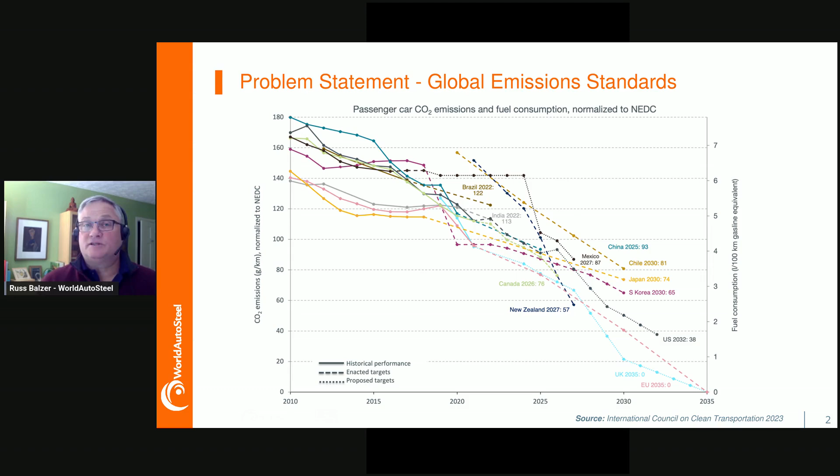These increasingly stringent regulations are intended to help the transportation sector play its part in reaching very specific emissions reductions targets. At WorldAutoSteel, we believe that the current approach to automotive emissions regulations is not an effective way to do this.

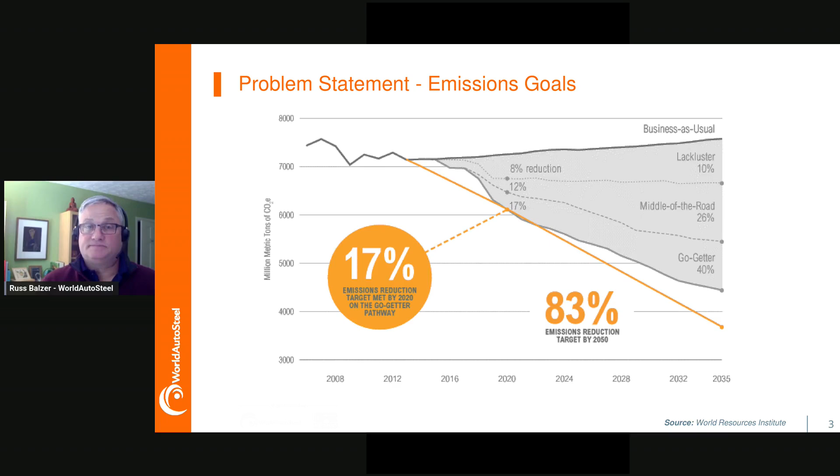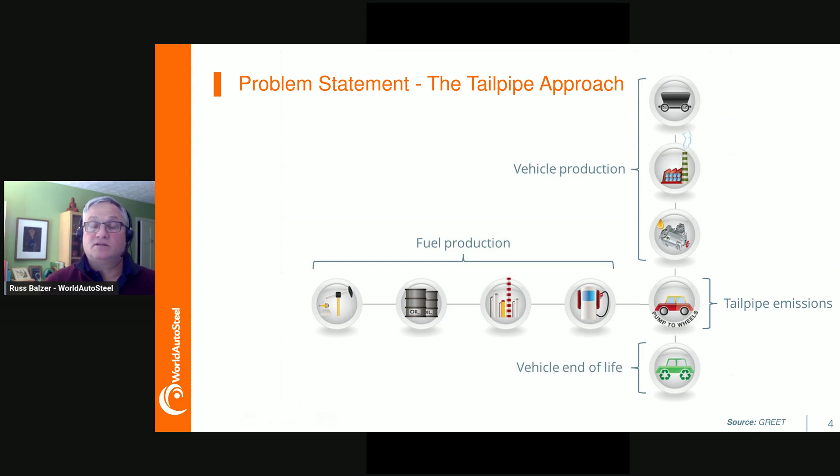The problem is that current regulations only look at tailpipe emissions, emissions produced while the vehicle is being driven. Other significant sources of greenhouse gas emissions like fuel production, vehicle production, and treatment of the vehicle at the end of its useful life are ignored. One of the effects of this approach is to force automakers to adopt vehicle lightweighting strategies that can lead to unintended consequences for the overall vehicle emissions.

The reason for this outcome has to do with the emissions from the production of the materials from which the vehicle is made. This chart shows the average primary production emissions for the major automotive structural materials. The values on the left are the greenhouse gas emissions per kilogram of finished material. The values on the right are estimated masses of an equivalent component made from each of these materials. This value reflects the average mass savings that you can expect from using each material.

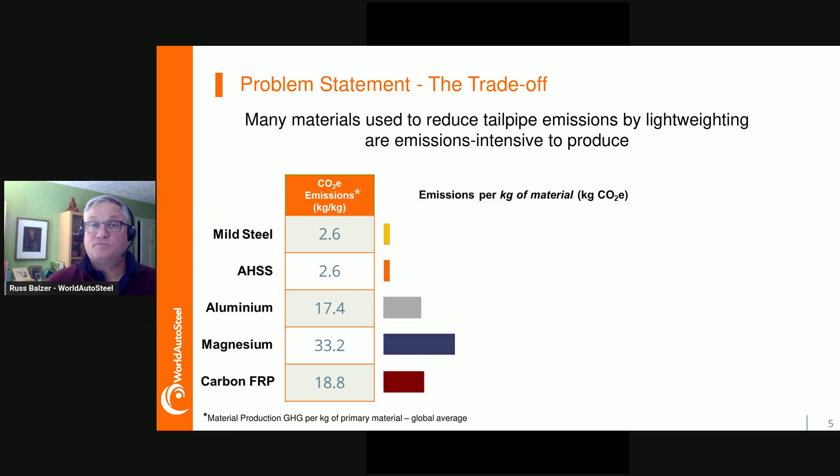By simply multiplying these two numbers together, we can calculate the greenhouse gas emissions that result from the production of each part. As you can see, for the lower density, more energy intensive materials, the mass savings are not enough to offset the increased greenhouse gas emissions. This can lead to the unintended consequence of higher emissions overall.

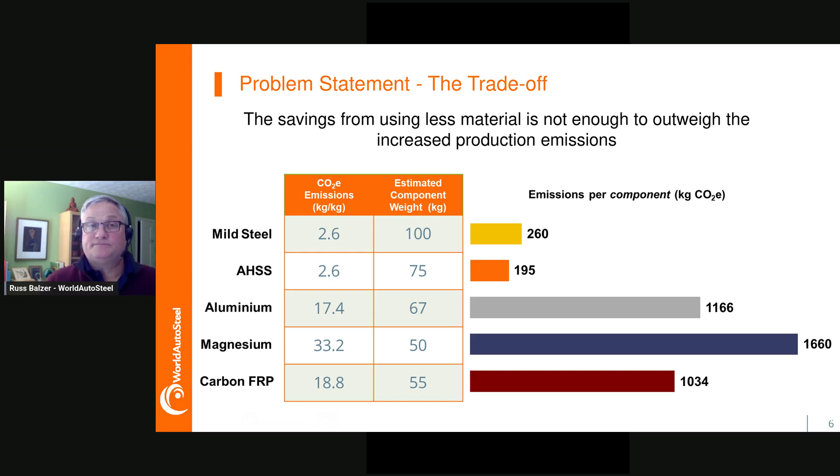This is, of course, not the whole story. Reducing the mass of the vehicle does decrease the fuel consumption, which reduces the tailpipe emissions. So doesn't this reduction offset the increased production emissions from the materials? Unfortunately, the answer is sometimes, but not always. By focusing on the tailpipe, current emissions policies only account for the savings during the vehicle use.

In the best case, the increase in production emissions is less than the use phase savings, so you do get some savings overall. In some cases, the increase in the production emissions is about the same as the use phase savings, resulting in no overall improvement. And in many cases, we know that the increased production emissions outweigh the savings in the use phase, resulting in the unintended consequence of higher overall emissions, the exact opposite of what the regulations are trying to do.

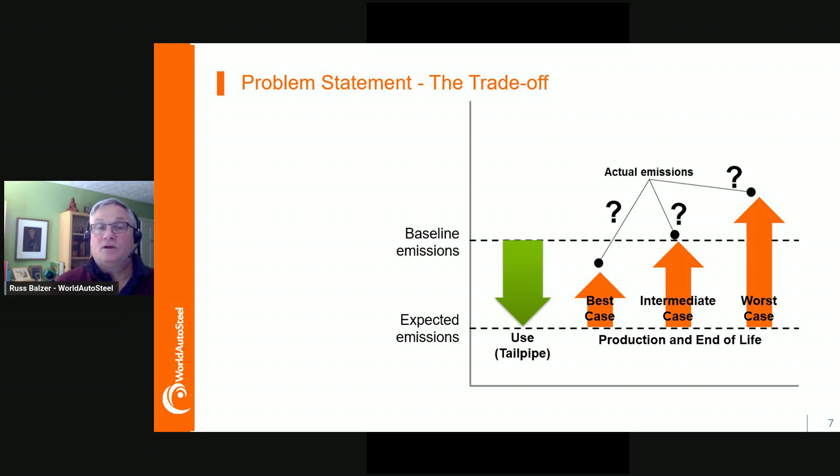Since current emissions policies do not account for the production emissions at all, they don't tell us which of these cases we're in. So we can't know if they are bringing us closer to our reduction targets or farther away. One thing we do know is that all of these cases come at a higher cost to the automaker and ultimately higher cost to the consumers.

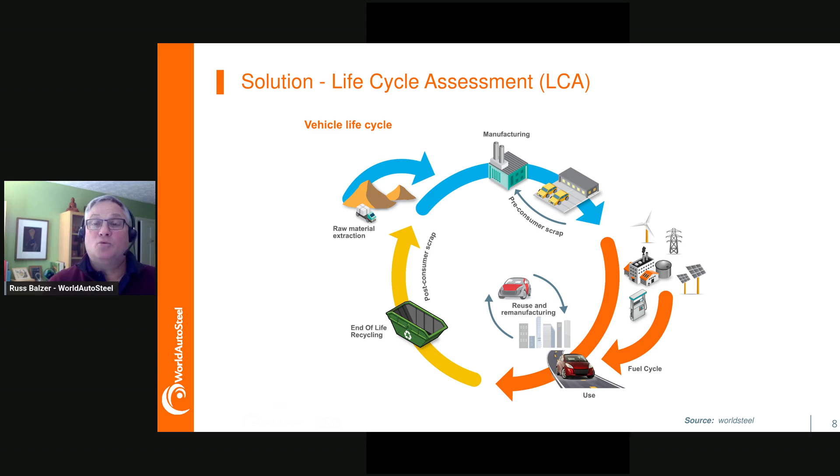So how do we fix this problem? We believe that an important part of the answer is life cycle assessment. Life cycle assessment is an environmental accounting method that looks at emissions across a product's entire life cycle, from the production of the product, including the mining and production of the materials from which the product is made, through the use and including the recycling or disposal at the end of the product's life. It's only by taking this life cycle perspective that we can really understand a vehicle's environmental impact and know whether or not our emissions reduction strategies are effective.

At WorldAutoSteel, we work with researchers, policymakers, and others in the automotive value chain to develop tools, educate stakeholders, and advocate for the inclusion of a life cycle perspective in automotive emissions regulations.